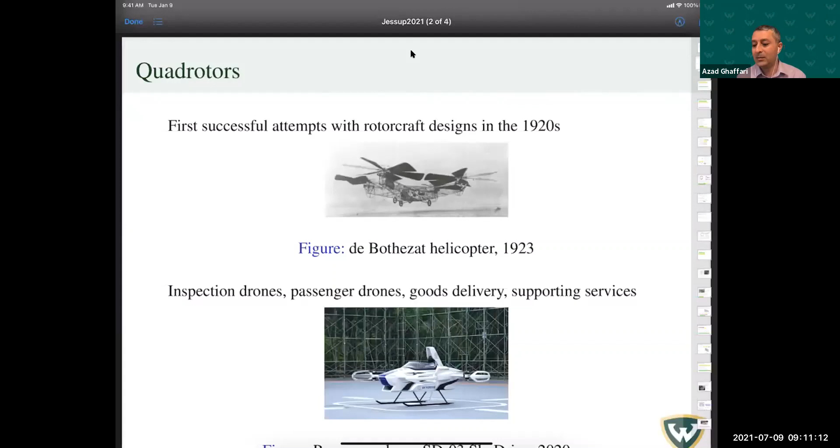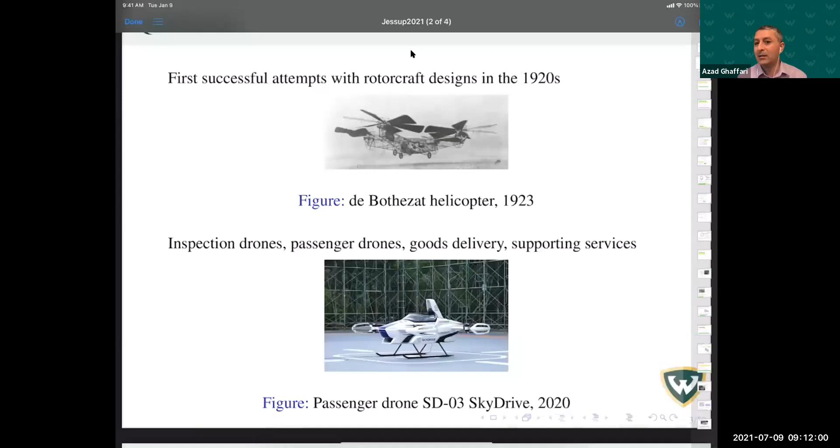We have seen the technology of drones and quadrotors explode to the extent that these days we have passenger drones. For example, we have multiple companies in Asia and in the US. The one that you see here was a prototype last year, and it can fly for almost 20 minutes. So that is still in its infancy. Passenger drones can contribute to solving mobility problems, especially in urban areas, because they can provide immediate relief to reduce traffic congestion in the future.

So what is the problem that we are trying to solve here? If you have a vehicle, either a UAV or a ground vehicle, it operates inside an environment, but the environment has multiple obstacles. The obstacles can be stationary or dynamic. In this demonstration, you can see that the UAV is shown in two different representations. The left one is the area vehicle representation, meaning that if you have an accurate model for the vehicle, you can incorporate those boundaries and limitations in the design process.

However, that complicates the problem dramatically. That's why in many cases researchers opt for the point vehicle representation, which is shown on the right-hand side. That means you are treating the vehicle as a point. But again, for tight maneuvers, for example if you want to park a vehicle, that has a different treatment. Obviously in that case, we cannot use the point vehicle representation.

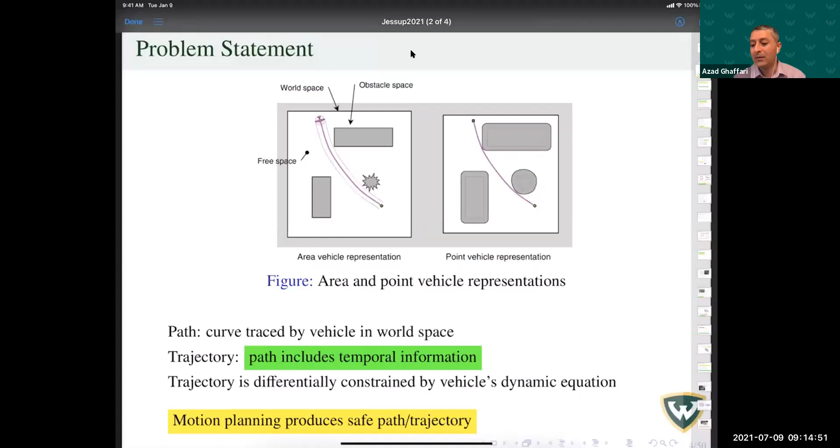Because we have dynamic properties associated with the vehicle, the trajectory is differentially constrained by the vehicle's equations. What we are doing here is trying to find a safe passage from the start point to the goal point, incorporating the dynamic behavior of the vehicle. If you look at the literature, the motion planning problem constitutes a variational calculus problem, and it has an analytical solution only for the simplest cases. So that's why you cannot expect an exact solution for the general situation.

And to this end, many approximation methodologies have been developed to come up with proper algorithms for motion planning. Many of these algorithms use the decomposition approach. By decomposition approach, we have 4 levels. First, the path planning problem is solved by approximation. And then, obviously, the approximation needs to be smoothened out.

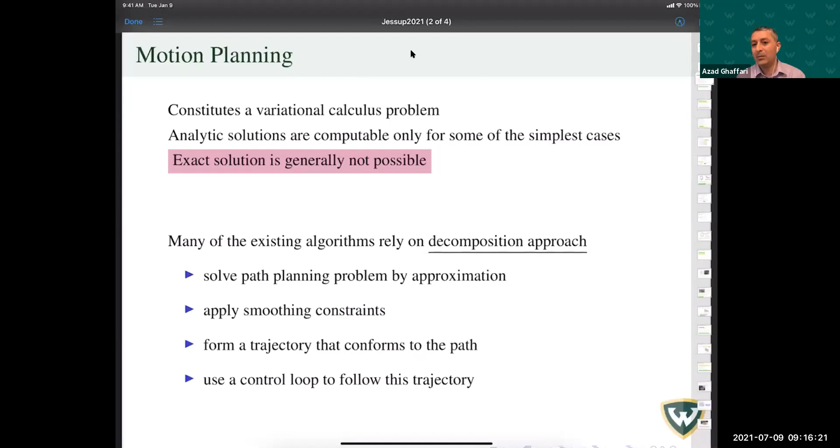And when we have the smoothened path, we then find the trajectory that conforms to the path. And then again, we note that the dynamic properties of the vehicle have to be incorporated into the trajectory. That means we have some dynamic constraints attached to the trajectory. And ultimately, when we have the trajectory figured out, there is a control loop that takes the vehicle through the environment on the safe trajectory.

But if you look at the problem, motion planning, trajectory planning, path planning, all of these phrases have been used interchangeably. These methodologies, because of the way that you solve the problems, are numerically intractable. It means if the number of obstacles increases, or the dynamic constraints in the environment increase, the solution takes longer to converge. So in many cases, you cannot perform agile maneuvers in the environment. And if we add additional complexity because of limited speed and acceleration, the problem becomes even more complicated.

So that's why many researchers have opted for feedback control, utilizing different feedback methodologies to navigate among an obstacle environment. The difference this methodology has in comparison with the existing motion planning methodologies is that you are not creating the safe trajectory. What we are creating is the safe control commands that allow the vehicle to safely maneuver inside the obstacle environment. So the popular methods that have been tried for using feedback control to achieve safety control.

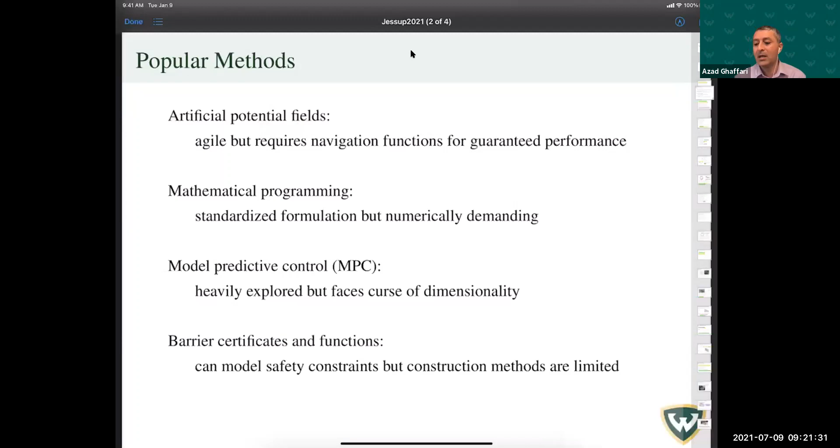The last methodology that has been recently explored is based on barrier certificates and functions. These functions are very successful at modeling safety constraints, and they can be used in conjunction with other methodologies. For example, you can use them with quadratic programming, or incorporate them with model predictive control. However, there is a catch with this methodology: the construction methods for the barrier functions are limited. As you see, for any methodology that we are exploring, there are some pros and some cons. But at the moment, because of the capability that the barrier certificates provide, and because they have been recently explored, we select the barrier certificates and work on these functions to create the safety constraints for our problems.

The design objective we have in this talk is to create analytically driven safety control algorithms. We want to minimize the numerical demand of the algorithm as much as possible. To that end, we allocate dedicated control modules with specified structures for various design criteria. The various design criteria come into play because we are dealing with a safety control situation. So you have, for example, a trajectory to follow, and then you also have to avoid obstacles.

There are also some constraints attached to the system that we are dealing with. So that means we have multiple design criteria. We have a multi-objective problem to deal with. So we use barrier functions to model safety constraints. And then we actually draw explicit relations for these barrier functions, which allow us to create assignable control structures, safety control structures.

And also the structure that we provide are parameterized. So that means the calibration and the design process becomes much easier because we have a limited number of control parameters that we can tune in an automatic manner, and that actually allows us to save time on design and calibration. So the control structure is modular, which reduces design complexity and improves scalability.

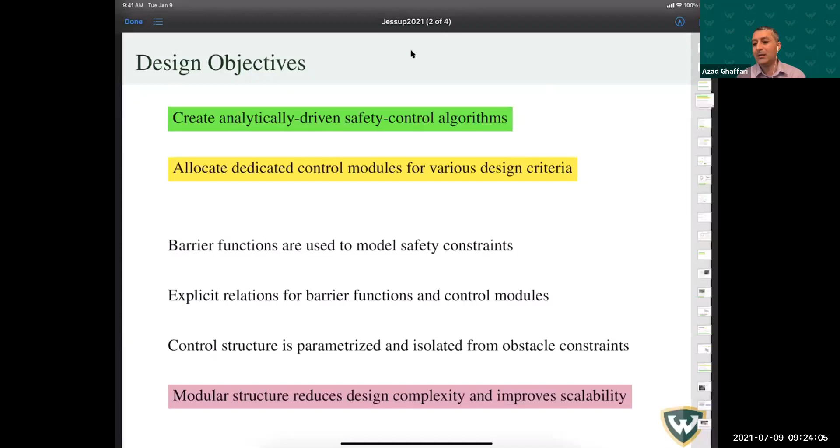Scalability is important because when you have an autonomous system in a cyber physical situation, the number of vehicles can be too many. So the number of obstacles, too many again. So it is important to have the control scalable because you don't want something which is super complicated. So if something changes with the vehicle or something changes in the environment, we need to have something which is easy to calibrate and tune. So that's why scalability is important and we highlight it here.

So the outline of this presentation, I divided in two sections. We first talk about the ground vehicles, which have actuator delay. The actuator delay in reality is translated into a limited thrust, a limited torque. So the objective here is we want to create agile safety control independent of the obstacle environment. The solution that we provide for this problem is to create explicit safety bounds using barrier certificates, and to compensate the delay on the actuator, we provide a two-layer Smith predictor, which we have shown in our experiments improves the transient performance of the algorithm considerably.

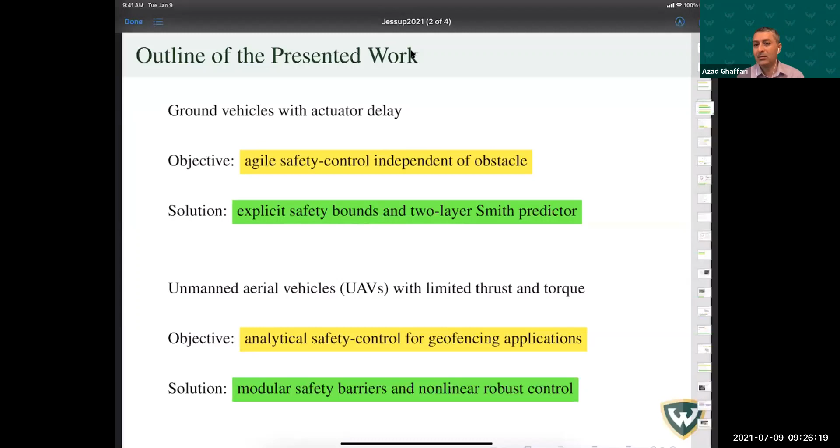The second part of the presentation, I talk about unmanned aerial vehicles. In this situation, we have limited thrust and torque. And our objective is actually to derive an analytical safety control for a geofencing application. So the geofencing application is another safety critical scenario. That means you have a safe net which you want to cast around the vehicle. So how to actually design the control that allows us to achieve the geofencing without challenging the control bounds of the vehicle. The solution that we have here is based on a modular safety barrier. And then we also use nonlinear robust control to achieve the desired trajectory tracking that we anticipate.

So let's go into the first part of the presentation. First is the ground vehicles. Our problem is to look at the safety control for ground vehicles. But there are some constraints attached with this ground vehicle. First and foremost, in many situations, we have time delay acting on the actuator. It means if you actually apply or actuate a specific control command, it takes some time to see the result at the output. On top of that, the ground vehicles that we have, they have under-actuated dynamics. So that actually complicates the control problem further.

On top of that, we also have multiple obstacles. So it's not that we are looking at a single obstacle. We have multiple obstacles, and the obstacles can take different shapes. For example, it could be an object or it could be a wall. So the methodology, we are using a nested modularity with integrated safety. And our solution is twofold. First, we have the two-layer Smith predictor, which allows us to compensate the time delay in the actuator. And the second contribution is the explicit safety control bounds that we found for the heading angles, which actually guarantees the safe performance of the vehicle in the obstacle environment.

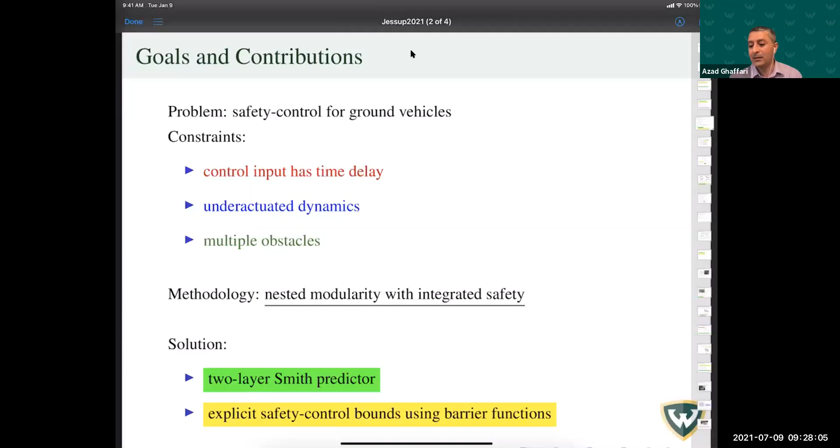The vehicle that we have in our lab, we base our study on this specific robot. It's a non-holonomic mobile robot. It has a differential drive, and it is equipped with multiple sensors: velocity measurement, acceleration, and, for example, bump sensors, cliff sensors. The kinematic model of this vehicle, if you look at it, is a third order equation, and it has been one of the benchmark problems in the control area in many papers. It has many interesting features. First of all, it has a non-holonomic constraint, which makes the control problem super interesting to analyze. And then on top of that, you have a servo system which actually drives the system. The servo system in this situation is comprised of two DC motors, and the DC motors, we can very accurately model as linear models.

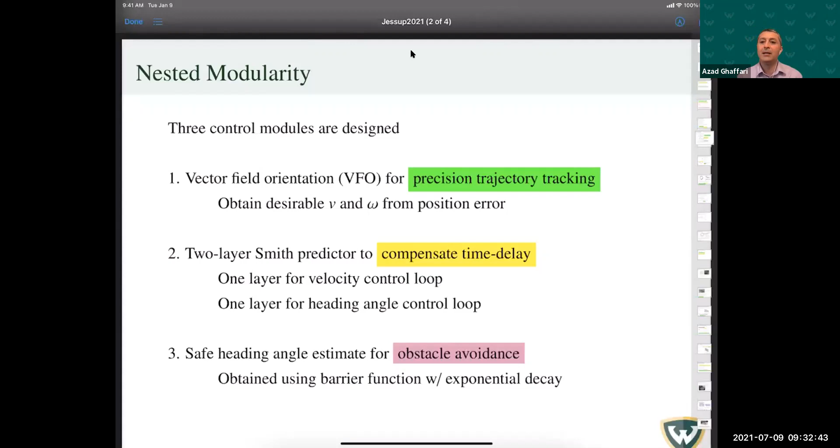And the last part of the algorithm, which is the safety module, comes into play. We use barrier certificates to obtain explicit bounds on safe heading angles. To this end, we enforce exponential decay on the barrier functions. And from this step, we get the safety filter, which we can incorporate in the design. And we show that the performance surpasses the existing competition.

So let's look at the first module that we are presenting here. The first module takes care of the trajectory tracking. If you look at this demonstration here, we have a red dot. The red dot represents the robot. The green dot represents the reference trajectory or reference path. The green arrow is the reference velocity vector. It has a magnitude of VR and the heading theta r. So the objective is to align the red vector with the green vector. But that's not the only concern that we have, because we also have position error, which is shown as the black arrow E in this demonstration.

Now what we can do is compromise. We can design the control such that we push the vehicle along the purple vector. If we do so, we are taking care of the first objective, which is aligning the red vector with the green vector, and the second objective, which is reducing the error. That is the purple vector. It is obtained through this calculation that you see on the left-hand side, which is shown as vector H, and that is the convergence vector field. The H vector, if you look at the magnitude, is VA. So that is the pushing control.

Azad, can I ask a quick question? Okay, the green arrow is tangential to the path. Yes. The path, if you look at the dashed black line, is the reference trajectory. So the green arrow is tangent to that reference trajectory. Thank you. Yeah, thank you. Okay, any other question?

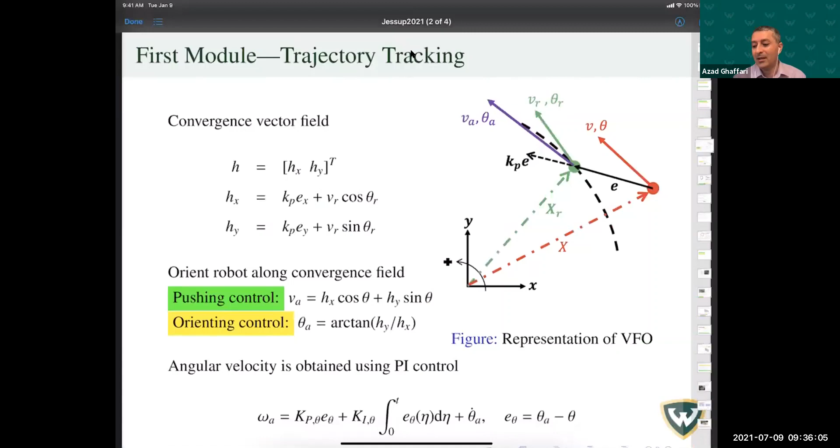Okay, so as I was saying, the differential drive servo system is comprised of 2 DC motors. You can pretty much use linear models to capture the dynamic behavior of these. If you look at the equations provided here for the left and right wheels, these are 2 linear equations. Lowercase d is the distance between the left and right wheels.

When we have calculated the desirable velocities, v_a and omega_a, from the VFO, we can actually calculate the desirable values for the left and right wheel velocities. Then we have an inner velocity loop to take care of this problem. That allows us to get the performance that we want from the VFO.

However, in this situation, we have time delay. When you have time delay, the VFO cannot get the performance that you are after, because we are changing the control signal, but the result shows up, for example, half a second or a second later. Half a second may not look like much, but it messes up the entire performance of the system. So that's why we propose a two-layer Smith predictor.

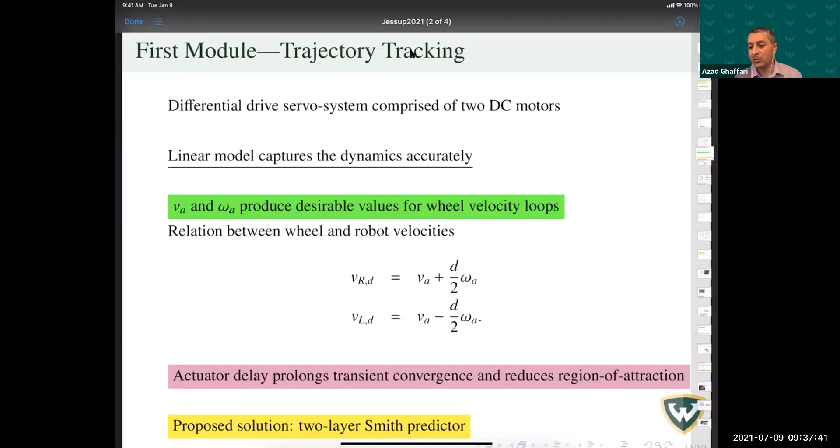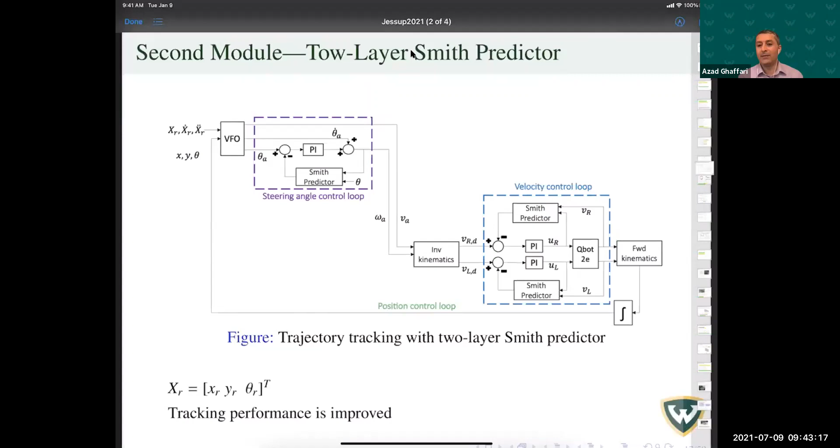And with this, we have shown that the tracking performance is improved dramatically. We have conducted multiple experiments, and one of the results that I show here is for a circle trajectory. As you see here, the dash-dot blue represents the VFO without the two-layer Smith predictor, and the red curve shows the performance with the two-layer Smith predictor. If you look at the right-hand side, figure A and figure B represent the position error and the heading angle error. As you see, the two-layer Smith predictor reduces the transient time by a factor of 4.

And it's observable that even the angle is performing much better. One important point here is that the angle plays a critical role in control of non-holonomic mobile robots, because technically the position X, Y is affected by the heading angle. So the slightest improvement in the heading angle improves the trajectory tracking dramatically. That's why we have the two-layer Smith predictor, because with a single layer, this performance cannot be achieved. And then the position error has basically gone down considerably.

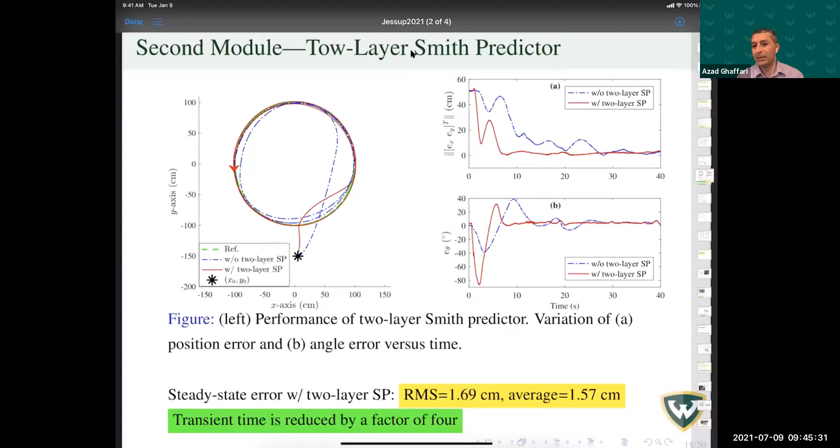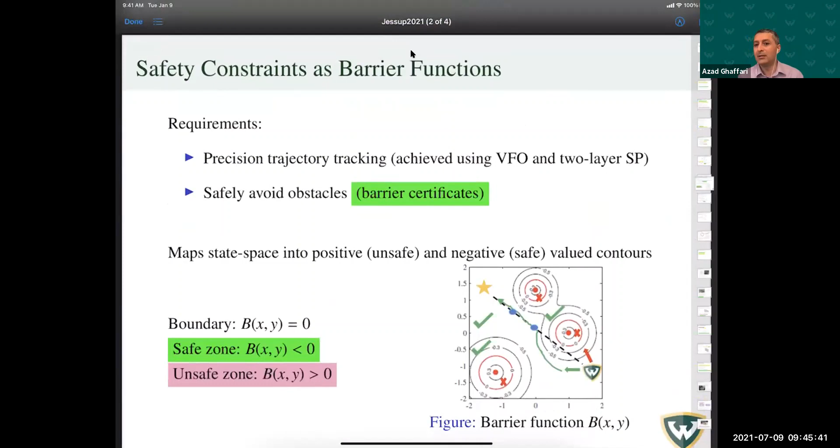The RMS value of the position error is 1.69 centimeter, and the average is 1.57 centimeter. Considering the accuracy of the measurement and the accuracy of the control commands that we have here, this is a great improvement in the trajectory tracking for this application. So we have taken care of the trajectory tracking, but we still have to deal with the safety issues. If we have an obstacle in the environment, how do we deal with it? Our intention is to design control modules that take care of these different objectives. The first two modules, the VFO and the two-layer Smith predictor, take care of the trajectory tracking, so we get precision tracking using these two modules.

Now let's look at the safety issues. Barrier certificates have the capability to map the environment into positive or unsafe zones and negative or safe valued contours. If you look at the figures on the right-hand side of this slide, the areas marked with checked green are the safe areas, so you can navigate in these areas. The red contours around the obstacles mark the boundary of each obstacle. The boundary stands for a zero contour, and the safe levels are defined as B negative. When B is negative, the vehicle is safe; otherwise, if B becomes positive, we are at risk of a collision.

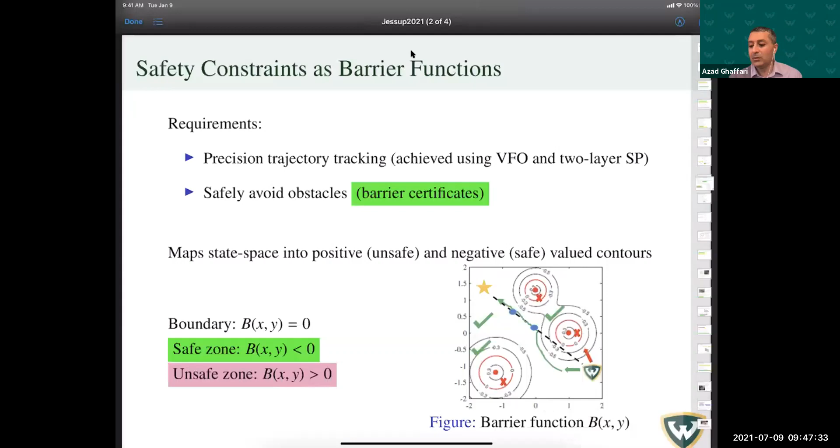Let's look at the mathematical foundation so that we can actually use it. Here we provide a basic introduction to barrier certificate functions. There are many different types; I can count at least 4 types of barrier functions: barrier certificates, Lyapunov certificates, Lyapunov barriers. Here we look at barrier certificate functions, just to conduct our analysis.

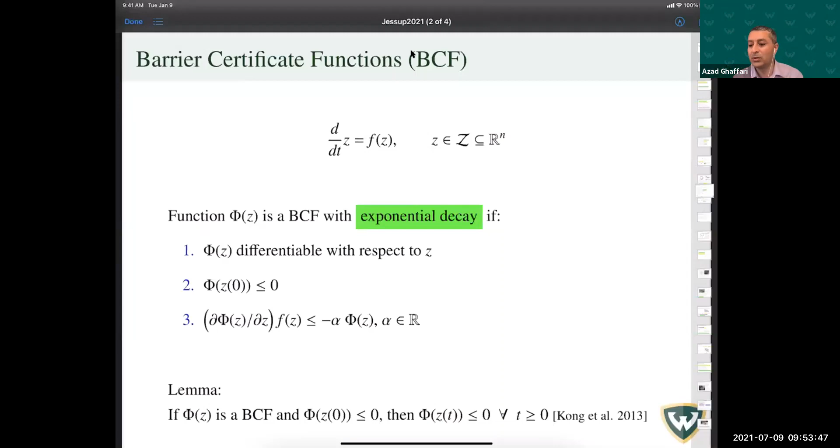The other methodology that has been recently explored is to use, for example, logarithmic functions or exponential functions like normal distributions. The map that you see here can be a candidate, implemented using a normal distribution like function. We have limitations in selection of the functions, but we can make assumptions to make our life easier. If you consider your obstacles as certain shapes, like a circle or a rectangle, there are already methodologies that allow you to get these functions. But if you have a more complicated shape, like a bigger obstacle or concave situations, that is still under development.

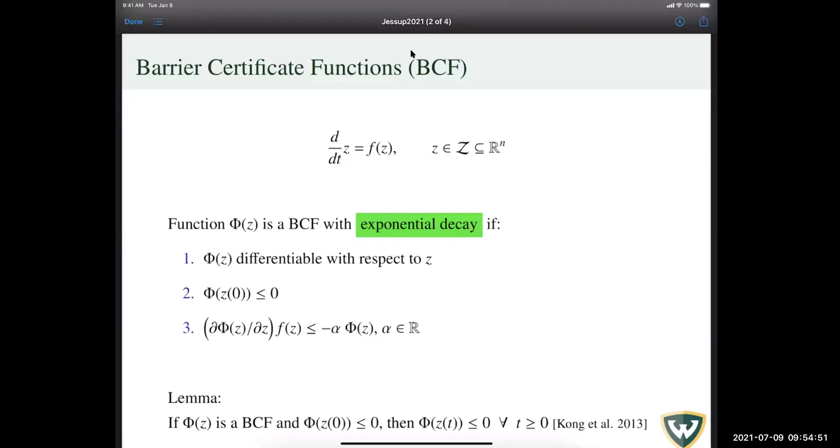Thank you. Okay, you're welcome. Thank you. So any other questions?

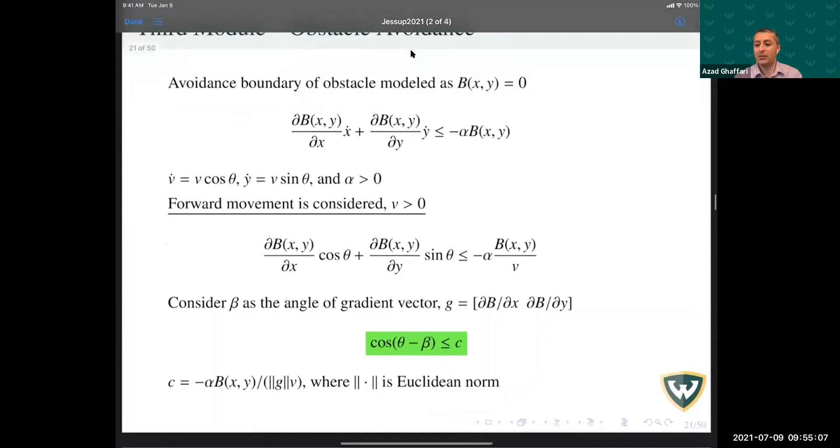Okay, so let's look at the capability that we get if we have a barrier certificate function. As we have here, if there is a barrier certificate, the boundary of the obstacle is shown as b equal to 0. The third condition gives us the exponential decay, which is shown as the first equation here. Let's say that we have this barrier function figured out for this certain situation. We have a bunch of obstacles, and we have figured out B here.

So now we have the equations to actually calculate the safe envelope for the heading angle. One assumption that we make here is the vehicle can only go forward. So this is just a forward moving situation. We cannot just come back, which is basically the assumption that we have to make when we are dealing with autonomous vehicles. If this is the situation, now using the third assumption on the barrier certificate function, if you do some simplification, you end up with the condition that is shown in the green box. This condition allows us to calculate the bounds on the safe heading angles.

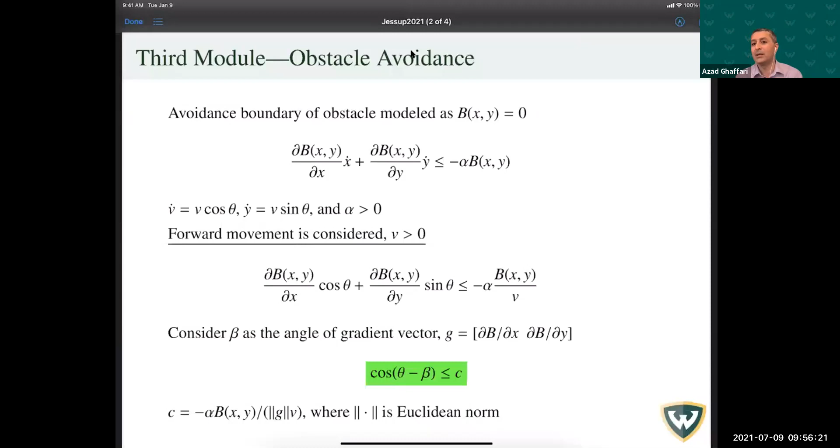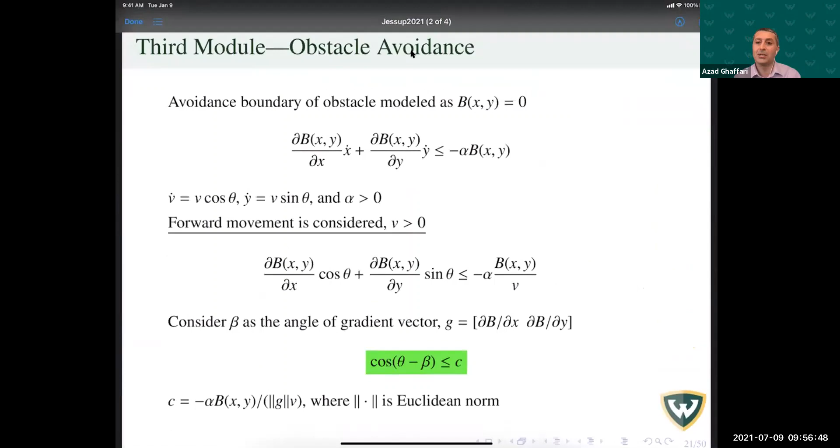Further calculation tells us, if you look at this inequality, we have a cosine function less than c, and c is an expression of the barrier function and g, which is the gradient of the barrier function. So it is a rather complicated expression. It's not just a constant value. It changes based on the position and the velocity of the vehicle. If we are far enough from the obstacle, this value of c is larger than 1. It means this condition is always satisfied, so the heading angle is safe. There is no need to adjust the heading angle.

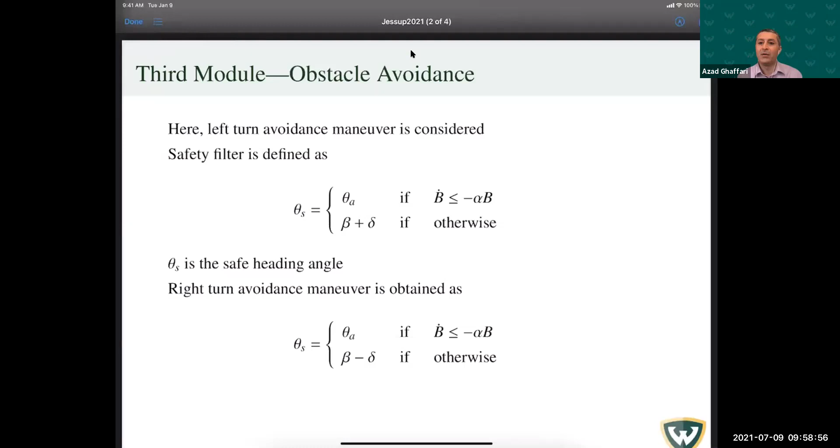If we go left, the upper condition that you see here is the calculation that we have to do to get the safe heading angle. If the barrier certificate satisfies the third condition, we don't make any adjustment to the heading angle that is calculated from the VFO. However, if the third condition from the barrier certificate is not satisfied, then we make an adjustment. Either we go left or right. If we go left, it's beta plus delta for the heading angle. If we go right, it's beta minus delta for the heading angle.

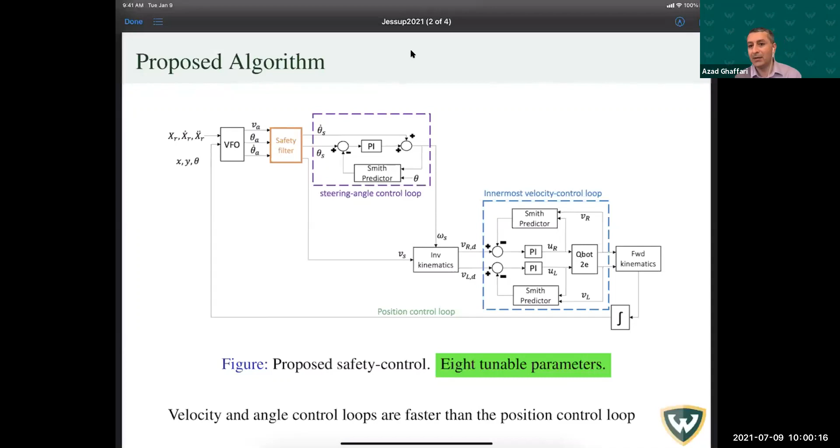One side note is that, to get the performance that we want, the innermost loop has to be fastest. That's why the velocity and angle control loops are faster than the position control loop, which is implemented using the VFO. If this is followed, now we can look at the experiments, see what is going on, and see if this works properly.

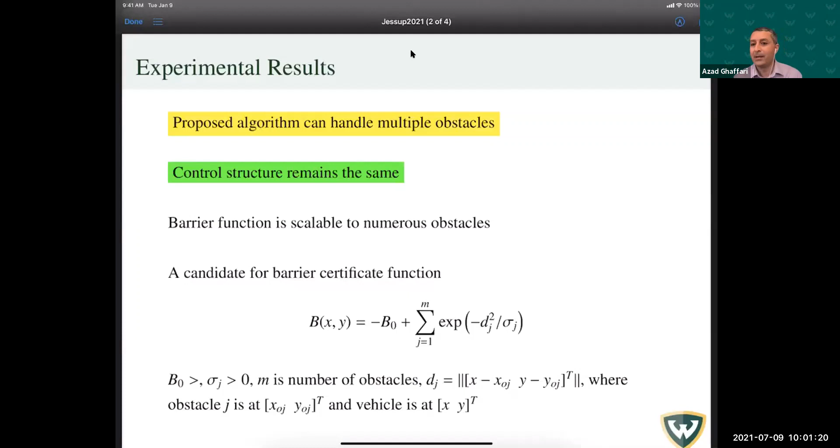This algorithm can handle multiple obstacles. The control structure is the same, so we don't have to modify the control structure. The only thing that changes if the number of obstacles changes is the barrier function. So the barrier function is scalable to numerous obstacles. One candidate that is used here is shown as this exponential function. This exponential function relates the distances between the obstacles and the robots and converts them to this barrier function. And we have some constant parameters, including B0 and sigma j, which allow us to further tune this barrier function.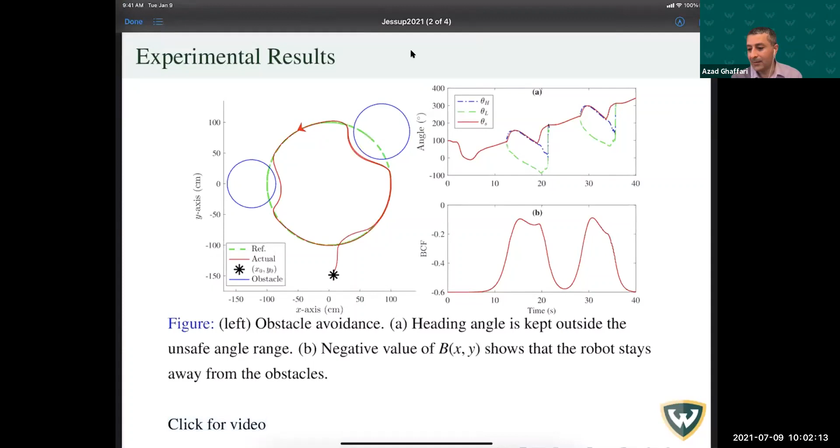Okay, so this is a demonstration of this case. You see the two obstacles that are in the environment, and the vehicle goes through the environment and avoids the obstacles. Because we didn't have a camera on top, the reference is a circle, but it is distorted this way to show this reference trajectory. So this is what is happening with this case. This is the first case, one of the experiments with the circular reference that we tried.

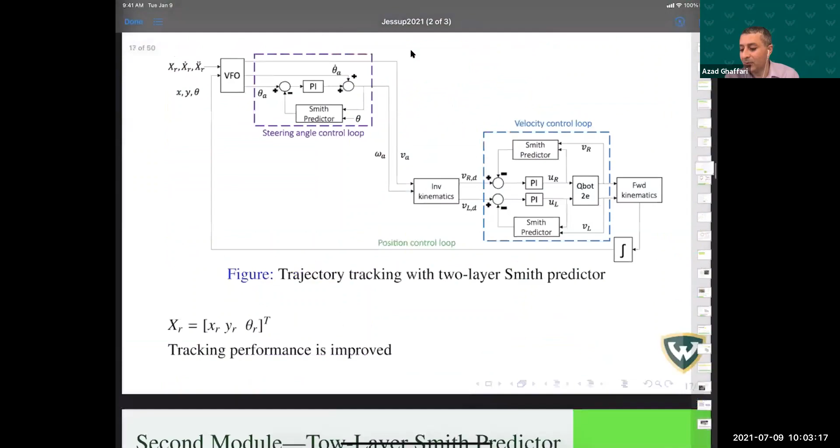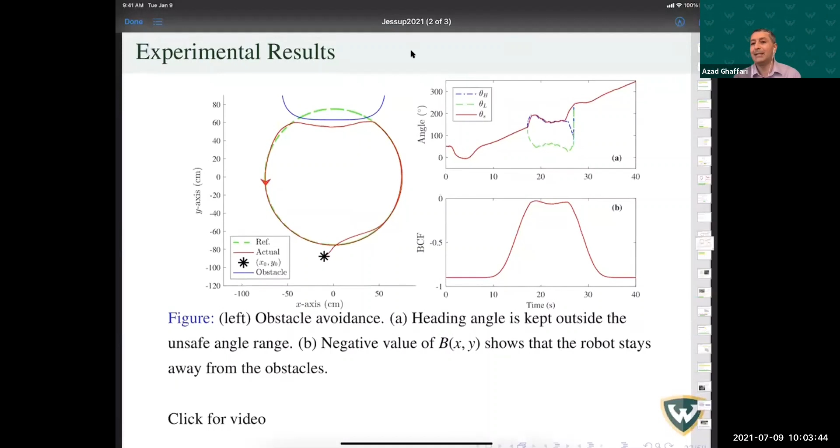So now we have another experiment done. This experiment is for the situation where we have a wall. If you have a large obstacle, it doesn't necessarily have to be a circular obstacle. It's a big obstacle which can represent a wall. So the same situation happens. You can see that the algorithm tracks the reference and then safely avoids the obstacle, and the heading angle is kept outside the unsafe cone, and the barrier certificate also stays negative all the time. So this is the wall experiment that you can see here.

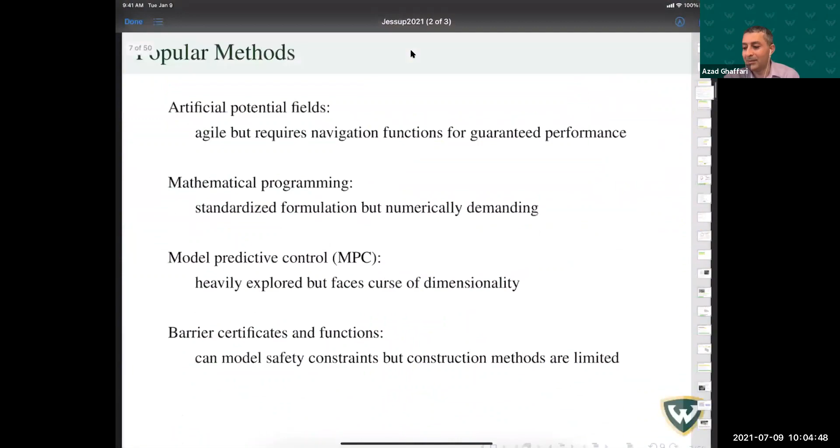Please pay attention that when the vehicle gets close to the obstacle, it adjusts the heading angle. You see, when it goes too far, it adjusts the heading angle to come back to the reference trajectory. And then after it passes the obstacle, it successfully goes on to track the reference trajectory. These two experiments were among the numerous cases that we tried in our lab. This experiment concludes our discussion about the ground vehicles. If there is any question about this case, I would be happy to answer. Otherwise, I can switch gears and talk about the aerial application of the safety control.

Hello, Professor. Hello. Can I ask a question? Yes, go ahead. How does the robot know the information of the obstacles? Is it using a map or is it sensing the obstacles? Okay, because we have a stationary environment, the map is already fed to the system. So that's how we get this done. At the moment, there is no algorithm, for example, simultaneous localization and mapping, involved in this process. We consider a map for the environment, which means that we already have the location of the obstacles available to us. All right, thank you, Professor.

You're welcome. So Azad, in the same thinking, because your optimization problem can be applied to multiple vehicles, in a multi-vehicle situation there must be some kind of V2V communication that will do the optimization at the same time. Yes, that's a good question, and that's the problem that we are currently working on. In that situation we have vehicle-to-vehicle communication, and that becomes very interesting because you now have the barrier functions changing in time. That means you have a time varying situation. That is pretty interesting when you have, for example, leader follower, or you want to overtake a vehicle. That is a situation where you need to have the information. It has been quite an interesting problem for us during this summer. In the lab, we have worked on these two problems. So that was a good question.

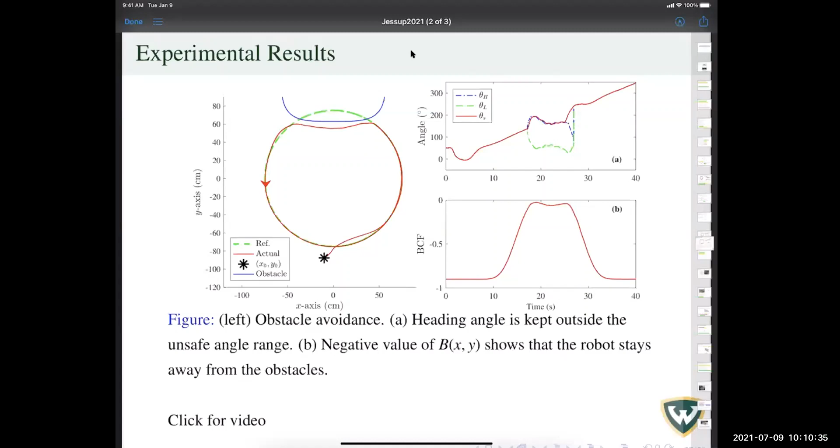Thank you very much. Thank you. Okay, so any other questions? Okay, so thank you very much.

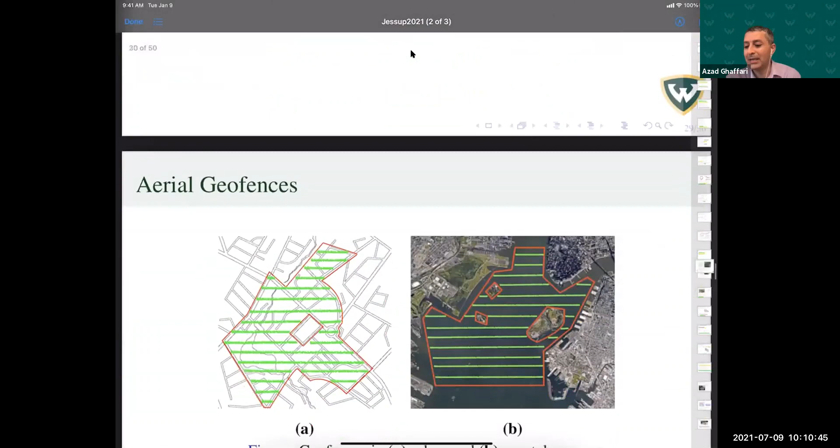Very interesting questions. So let's look at the unmanned aerial vehicles. As I said, especially passenger drones have become quite interesting these days. I think in 2016, a company in China, Ehang, created a vehicle that you can actually purchase. It's a flying passenger drone. The price is quite high, $250,000 US dollars, and you can fly maybe for half an hour, but that's just the start of this technology, maybe in 15 years or so.

In 15 years, it has been estimated that by 2035, the share of passenger drones will be almost 35 or maybe 40 billion US dollars. That's quite a big market, which will open new areas to this technology. If you have a passenger vehicle, one situation is that you want to contain this vehicle inside a safe net. So you cast a safe net around the vehicle.

For example, if you are operating in an urban setting, as shown in this left-hand figure, the dashed green area is your safe area to explore. You cannot get out of this area or get into the middle of this urban area. Or if you have a coastal situation, maybe you have some structures on these islands on the right, where you don't want civilian drones to get to those areas. That's why the geofencing problem comes into play, and barrier certificates are quite capable of modeling such conditions. As we talked about, barrier functions can be used for obstacle avoidance. Now we explore the possibility of using them to get this geofencing control design done.

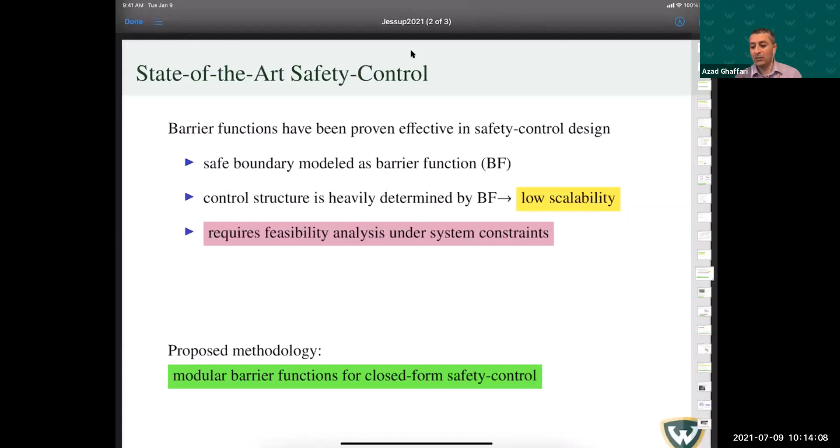That way we can actually facilitate our feasibility analysis, because in this situation we have limited thrust, we have limited actuation, and that brings up some new problems about feasibility analysis. So what we are proposing here is a modular barrier function, which gives us a closed form for safety control. So with this problem, again, we have some limitations.

The input, the control commands are saturated. So there is a limitation on the control command. The system, again, is underactuated. We have a 12th order system. However, we have 4 actuations, so that's it. So we have to deal with this property of the system.

And then on top of that, we have low rate position measurement. In reality, even if you have a GPS system, you cannot rely on that kind of information. So that's why we need to consider this limitation when we are designing the barrier function.

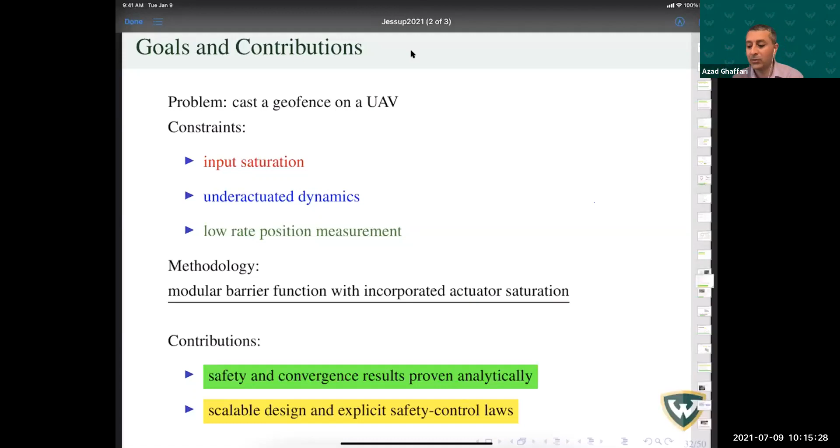So what we get out of this proposed solution is an analytically proven safety and convergence for the algorithm that we have, meaning that we can prove analytically that we follow a given reference trajectory and we safely stay inside the geofence. And our design is, again, scalable because it has an assigned structure. And then the control laws are explicit.

So this is the UAV that we have in the lab. It is designed to withstand tough experimental situations which we come across in the lab because we have limited space. So this guy has interesting behaviors. As I said, it is a 12th order system. But with some interesting methodologies, you can convert this complicated system to 6 decoupled double integrators.

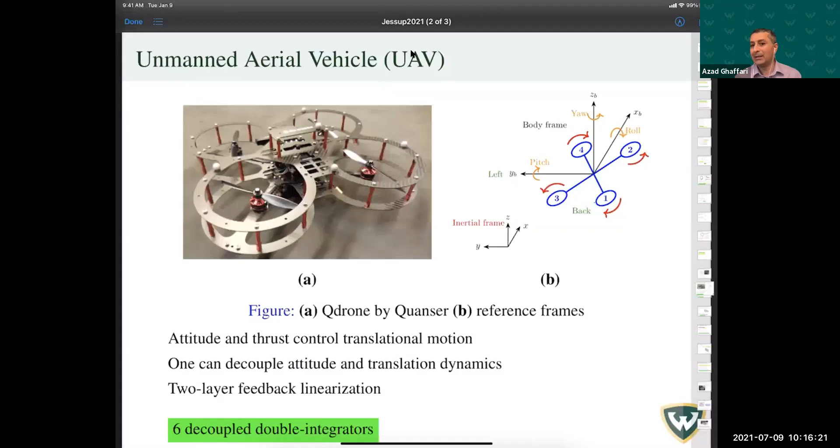That means we can now look at one double integrator to analyze its behavior, and then expand this in a modular fashion to get the safety control that we want. This process is done through a two-layer feedback linearization, which is a quite popular methodology. So let's look at this double integrator problem that we have here.

So we start with the simplest situation. Let's say that we have the barrier position at the origin. We want to maintain the position always below the origin, meaning that we want to make the position always negative. Keep in mind that in this situation, the acceleration is limited. Because we have limited resources, we cannot accelerate or decelerate infinitely. So the problem is to design the safe limits of the acceleration such that the position stays negative for all feasible initial conditions.

Again, this is important because x less than 0 includes many initial conditions, like half of the space. But half of the space is not feasible; some of them are not feasible initial conditions. So that's another thing that we need to take into consideration. What we do is incorporate the control saturation into the shape of the safety barrier that we obtain. If you look at this double integrator, because it has limited acceleration and deceleration, if you sit inside this gray area, you can go to the origin and stay inside the shaded area with the limited acceleration and deceleration you have.

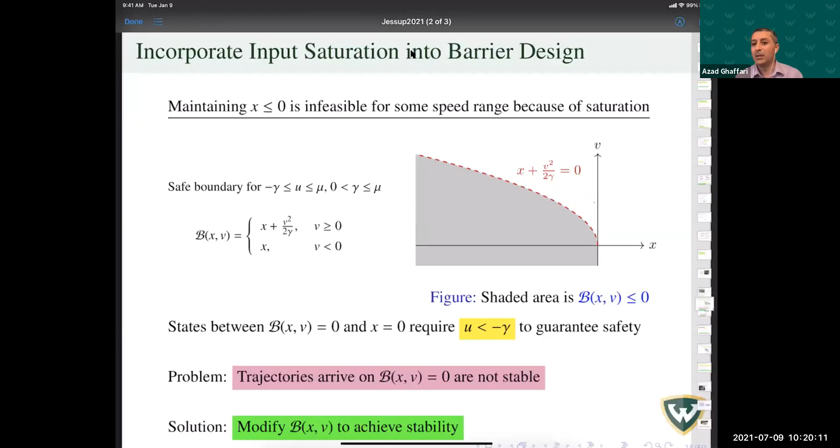So, or even if you don't have uncertainty, you won't stop at the origin. Stopping at the origin is important because we also have to prove the convergence of the algorithm. If we are to track a reference trajectory, we have to know at each moment where we are staying. That's why we need to modify this barrier function such that if we arrive at the barrier function, we can show that the system stays at the origin.

For this purpose, we look into some modification methodologies. If you look at the functions drawn in this plot at the bottom of this page, you have a dashed blue, dashed black, and then green, and the red one is the curve that we have found, which does not let the vehicle stop at the origin. However, the other curves actually stand for beta x. So beta x is the function that represents these three other curves.

In this situation, we have a constant parameter rho, which changes the shape of this function. As you see, if you decrease rho, make it small, you can get as close as possible to the actual barrier that we found initially. But the difference is here: if you look at the equation, especially around the origin, if you do some linearization, you can see that the approximation is v plus square root of gamma over rho times x equal to 0. Because the square root of gamma over rho is a positive value, you know that this equation gives you a stable motion. It means the position will stop at the origin.

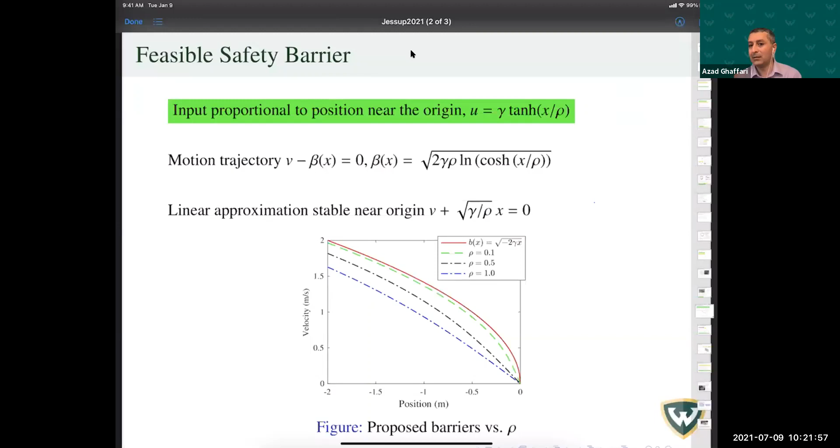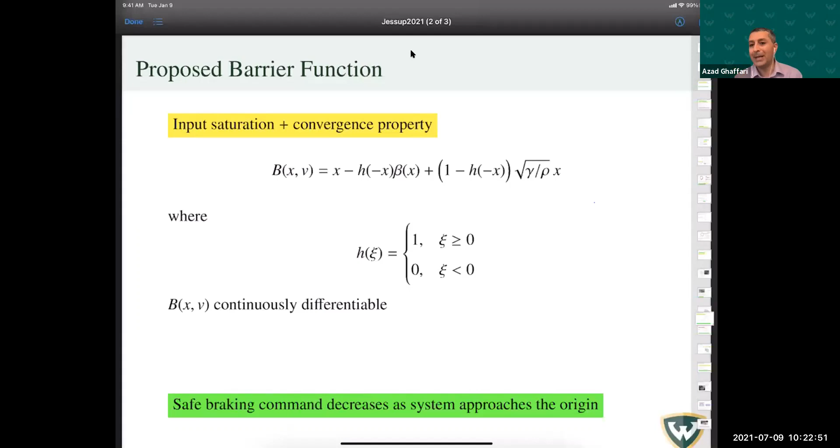So this function is giving us two things. One is the feasible initial conditions, and the second is a stable motion, meaning that we will stop at the origin. To do this right, we present this in a proper mathematical form. Please note that h is a step function. However, if you look into the mathematical properties of this proposed function, it is a continuously differentiable function. With this barrier function, if we obtain the control command, we can see that the safe braking command decreases as the system approaches the origin. That means we can keep the vehicle to stop at the origin. That's a key property that we need to get the performance that we want from our trajectory tracking.

So this is the first result that we present regarding this safety feature. First, we know that the input is saturated between minus mu and mu, where mu is a positive value. Then we know that B, which we found in the previous slide, is a barrier function for the double integrator that we have discussed. The safe set of this barrier function is shown as capital omega. We go through the mathematical analysis and get the safe bounds on the control command. If we maintain the control command always less than US, shown as this expression in the middle of the page, we can show that the safe set omega is forward invariant for all time larger than 0. Forward invariant means if you start inside that set, you stay inside the set forever. So that means the safety is satisfied.

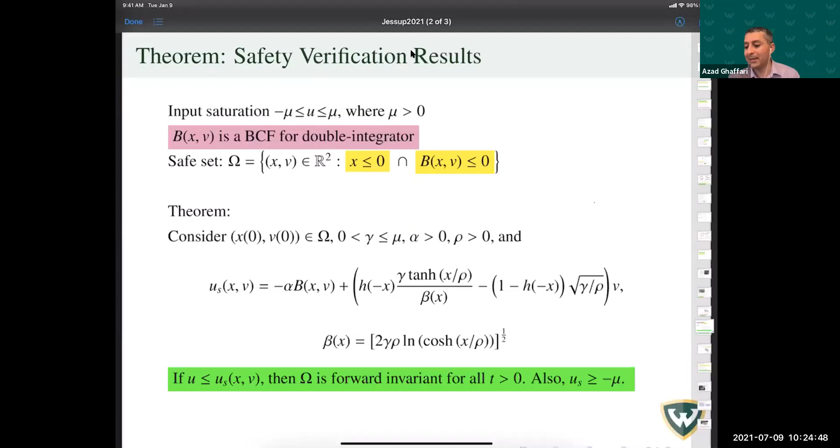On top of that, another cool property that comes with this barrier function is that the function US is always larger than minus mu. That is why this allows us to use the expression that we have found as a standalone block in our control design, because we know that the control value always satisfies the limits of the actual system. So if you have this limit on the control, obviously it gives you safety.

How about the convergence? That was among our initial considerations, because safety is not the only objective. The second objective is that we need to converge to the origin, to maintain the tracking at an accurate level. For that, we modify the control signal using the saturation function provided here. The saturation function represents the actual actuator that we have, which is between minus mu and mu. The part that goes inside the saturation block is a minimum function, which is the minimum of UR, a function that comes from a trajectory tracking algorithm. It doesn't matter what kind of trajectory tracking you are using.

And then you have US, which is actually found from the previous theorem, which is the upper bound of the safety control that we have found. So if we have this control block implemented inside our system, we have both safety and we also converge to the desired position, as long as the desired position stays inside the feasible area.

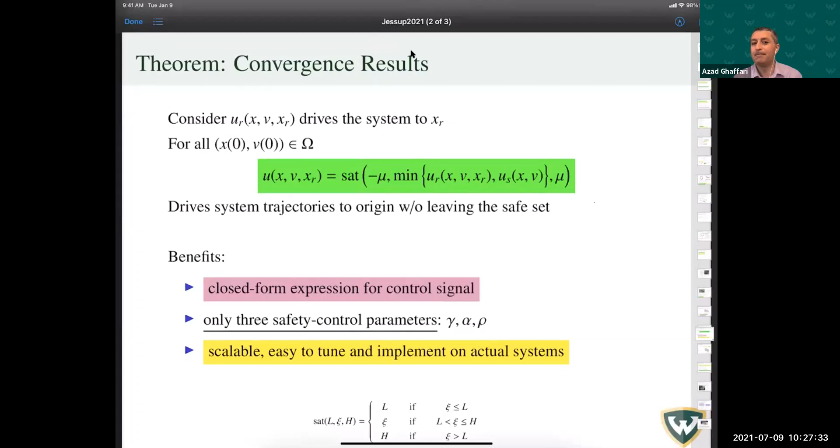So before I move on, any question about this first part of this geofencing problem? Okay, no question.

So let's see. In reality, you may want to limit the vehicle between a low and a high value, it's not just an open-ended situation. You just have to maintain the position between a low and a high value. Now, because this barrier function has a modular structure, and we have found this for x less than 0, we can shift this function to left and right to get the barrier functions to maintain the vehicle inside an upper and lower position. As you see with this modification, the shaded area is the safe set when we have a lower and an upper limit for position. The safe set becomes obviously a little more complicated to express, but nevertheless, it has a defined shape.

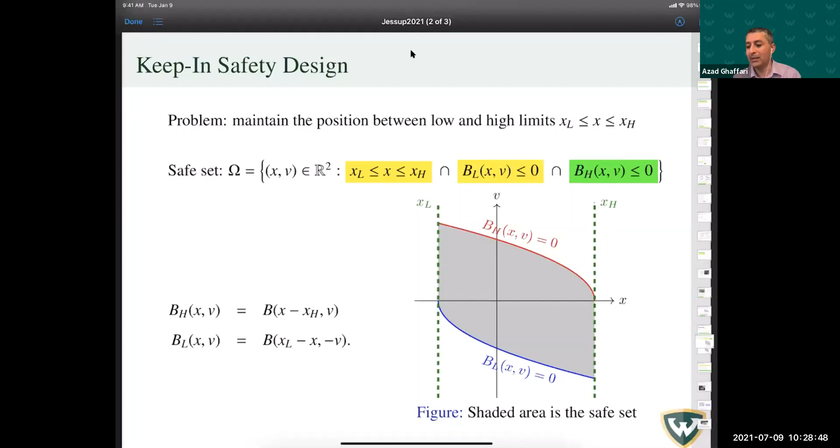From this, we can find the keep-in safety design when we want to maintain the position between a low and a high limit. This is the expression that we get for our control signal. It has a nested saturation function, one saturation nested inside another saturation. The outer saturation function represents the actuator which comes with the system. We represent it here mathematically to reflect the fact that the system has limited actuation.

The inner saturation function is maintaining the vehicle safely between the low and high position values. And then the innermost part of this saturation, which is UR, is the reference tracking, or the trajectory tracking. As we said, this trajectory tracking algorithm can come from any design that you have. It could be nonlinear, sliding mode, PI, or PID. It doesn't matter. As long as you have the control commands for the trajectory tracking at your disposal, just plug it here, and the rest is ensured that you get the safety that you want.

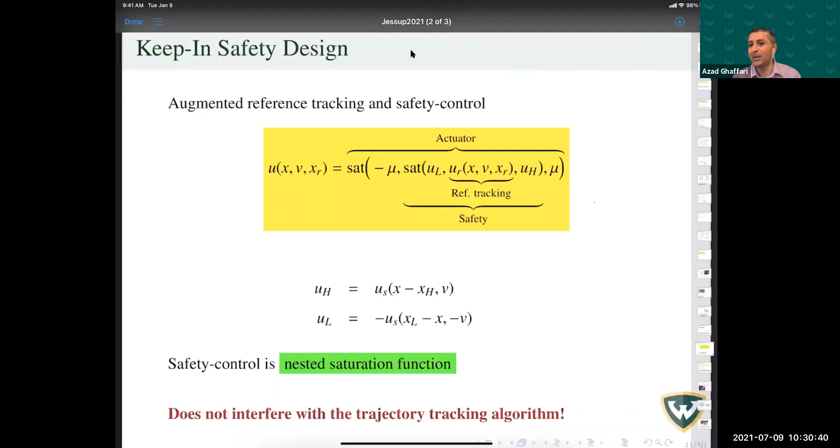And that's a big plus, because you don't want to redesign the trajectory control algorithm that you have. If you have, let's say, a bunch of vehicles, why would you want to redesign the trajectory tracking if it performs right? You just plug the safety block inside the algorithm. The tracking algorithm that we have used here is based on the super twisting algorithm, and that's not the focus of this work. If somebody is interested, we can talk after the meeting. We have used the super twisting algorithm to get the performance right for the trajectory tracking. We also used different variations of PID design, but the super twisting is by far the best performance that we have got so far.

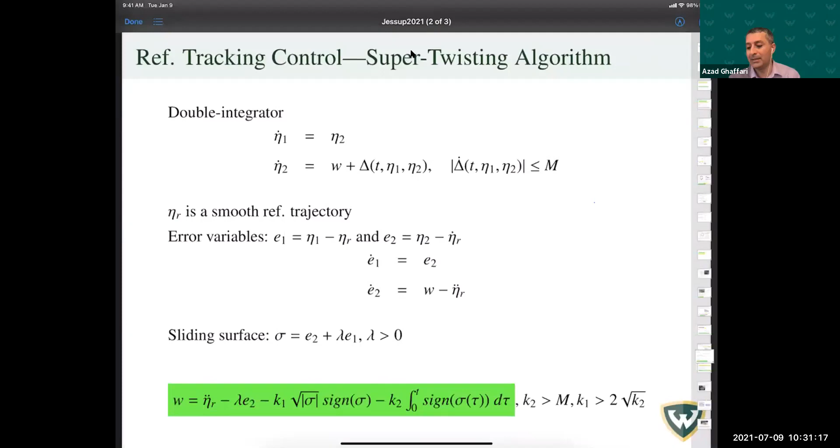So this is the summary of our control design for the UAV. We have a system which is under-actuated. It has 6 degrees of freedom, so it's a 12th order system with 6 degrees of freedom and 4 actuators. We use feedback linearization to convert this into 6 decoupled double integrators. We use the attitude and thrust.

So meaning we use the rotation and thrust to control the trajectory. And then we use the roll, pitch, and yaw torques to actually control the attitude, meaning the orientation of the vehicle. Because the UAV's trajectory is controlled through attitude, the attitude loop has to be faster than the trajectory tracking loop. So the modular design allows us basically a similar safety control structure for all the translational axes.

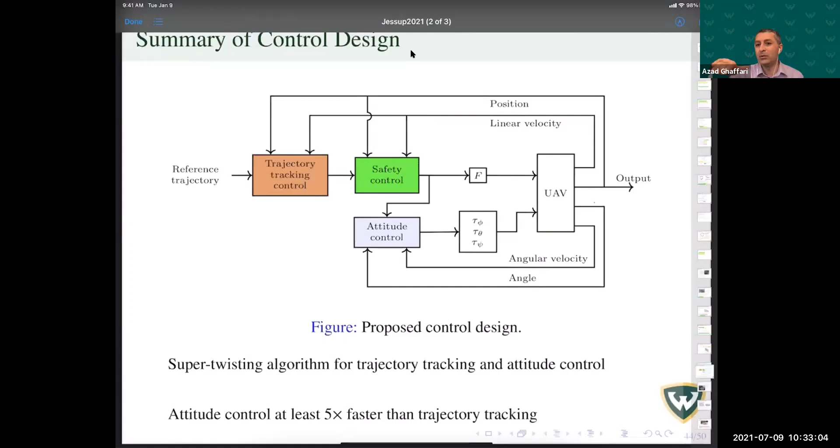So this is the block diagram that we have. And as you see, the safety control actually sits in between here, so it does not mess up any part of the design that we have here. And as I mentioned, the attitude control is actually faster than the trajectory tracking control by a factor of at least 5. Because you are actually producing torque by rotating properly, you need to rotate fast enough to create the torque that you like. So that's why the inner loop has to be faster.

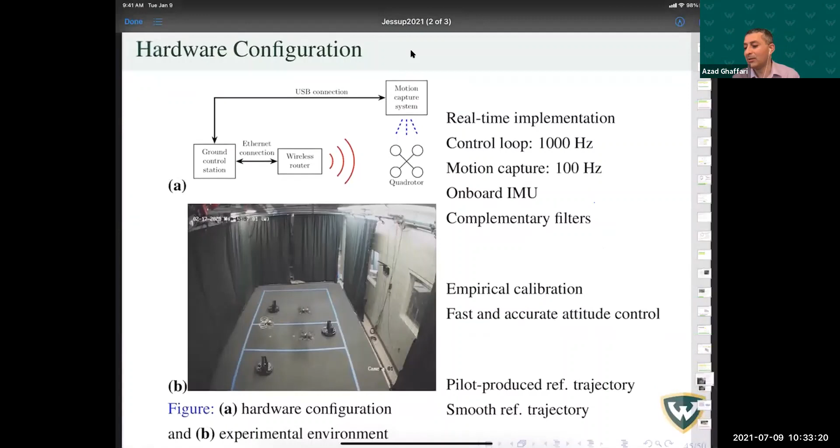So this is the hardware configuration that we have. As you see, the lab that we have is not that big. So hopefully we can convince the department to give us a bigger space down the road when we expand our experiments. We have a control loop which runs at 1,000 Hertz, and the motion capture system runs at 100 Hertz. So that means the position information is updated 10 times less than the control loop. We have onboard IMUs, and complementary filters are used to improve the position estimation that we have here.

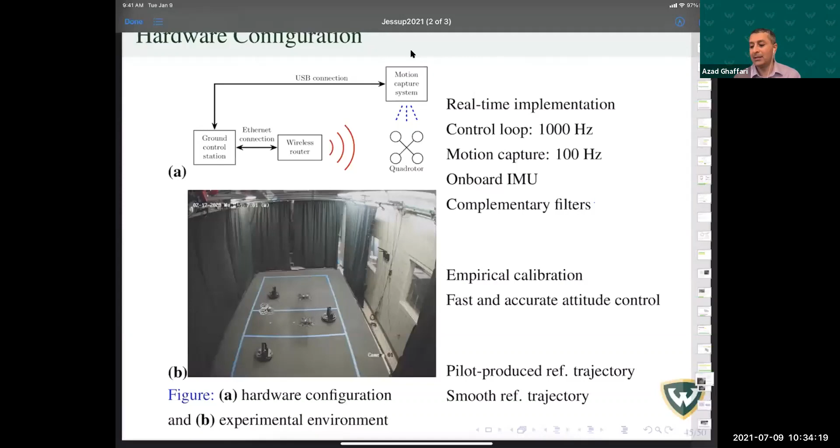And then we have 2 cases presented here. One case is a pilot-produced reference trajectory. This one is conducted to test the robustness of the algorithm. If we change the reference, what is happening with the algorithm? Does this algorithm survive the changes that are produced by the user? And the other application is when you have a priori reference trajectory. So let's see what is happening. So this is the first case.

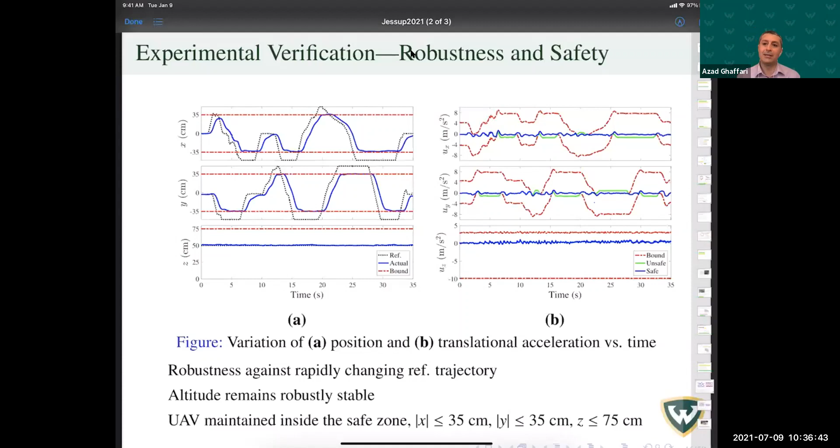And on top of that, if you look at the behavior of Z, because we are doing these maneuvers along the XY axes, the vertical axis stays rather stable. So that means our algorithm is both robust to changes in the X and Y axes, and it is also safe, meaning that we can guarantee that the vehicle stays inside the safe zone, regardless of the changes that are forced by the user.

So the second experiment is the case where the reference is already known. We have a priori reference. If you look at the black dot, that's the hover position. So we bring the vehicle to this hover position, and then we go on a spiral. The dashed black line creates a spiral, but that spiral actually goes outside the geofence that we have put around this vehicle. But because of the safety control, the vehicle is maintained inside this geofence. And if you look at the right-hand figure, X and Y, the safe limit on X and Y is 35 centimeters.

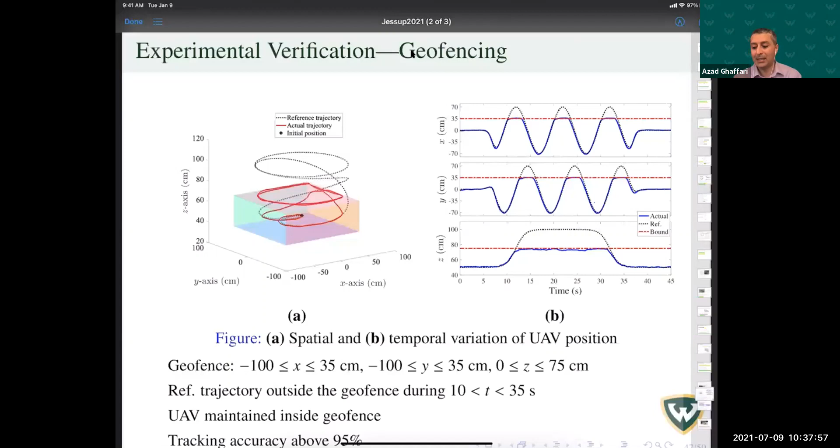And then you see that the algorithm successfully maintains the X and Y at the predefined limit. And the Z also is maintained at 75 centimeter, despite the fact that the reference actually goes to 100 centimeter. And then the accuracy actually is quite good here. So we have a 95% accuracy for the reference.

And also, one other thing that is worth mentioning, similar to the ground vehicle, the attitude actually plays a key role in the performance of the system. And as I said, the attitude control is almost 5 times faster than the, okay.

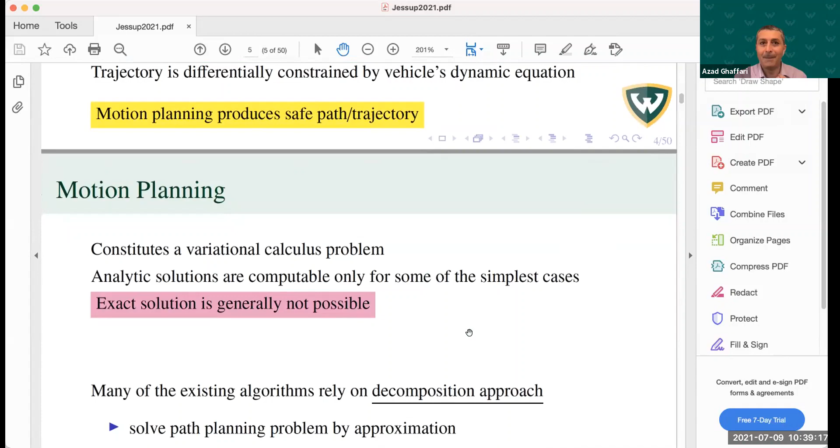Okay, sorry, I think, can you hear me? Hello? Yes. Okay, sorry, I think I lost my iPad, so I continue from my laptop actually. So let me go to the slide.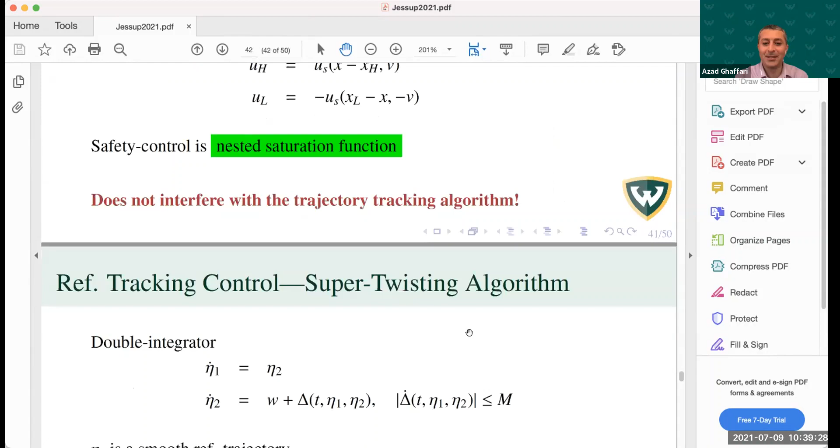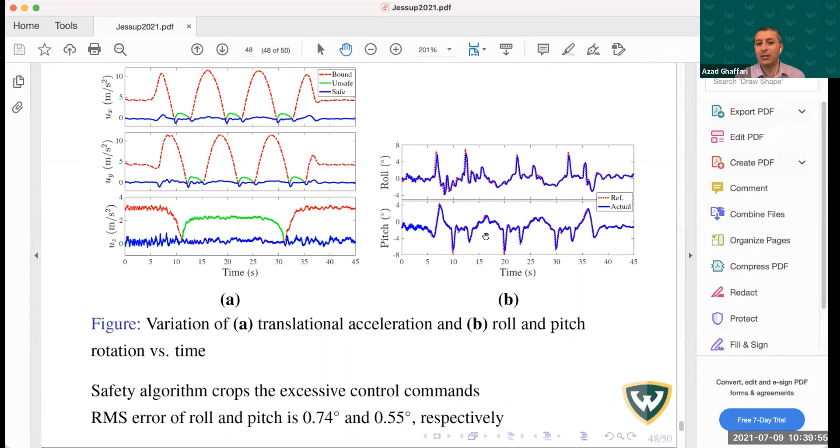So, as I was saying, this is the performance that we get from the attitude control. And as you see, the attitude actually tracks the reference attitude quite accurately. And the RMS error for the roll and pitch is less than 1 degree. So that's quite good.

And with this, I want to say a little bit about our university. Wayne State was established in 1868. We have been in the Detroit area for more than 150 years. And we are proudly serving more than 26,000 students, mostly from Detroit. We have a diverse population, minorities, so many different groups.

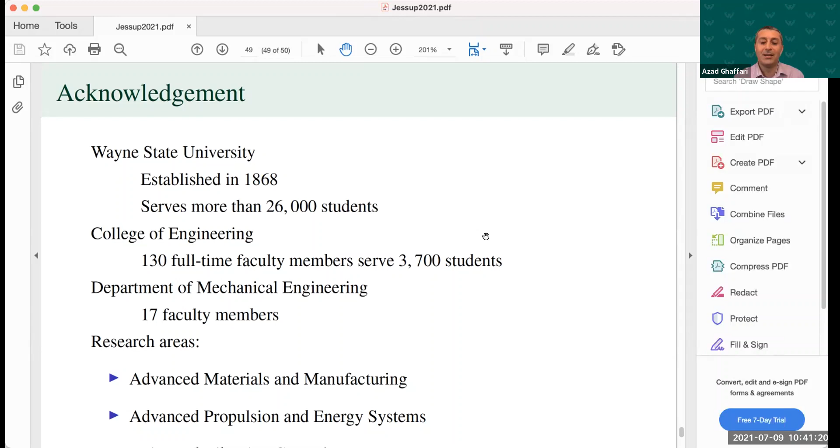And in the College of Engineering, we have 130 full-time faculty members. We serve 3,700 students from different backgrounds. In the Department of Mechanical Engineering, which is the department that I'm associated with, we have 17 faculty members, and we anticipate having some new faculty in the coming years. Our research areas are in three main thrust areas: advanced materials and manufacturing, advanced propulsion and energy systems, and noise and vibration control. Obviously, my area fits with noise and vibration control.

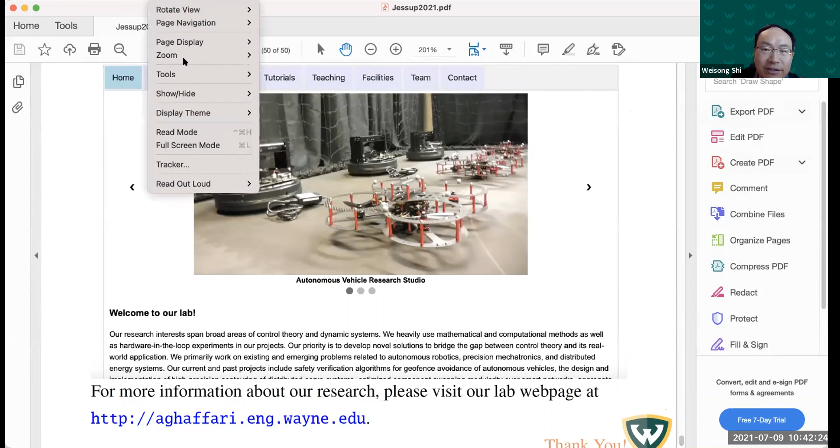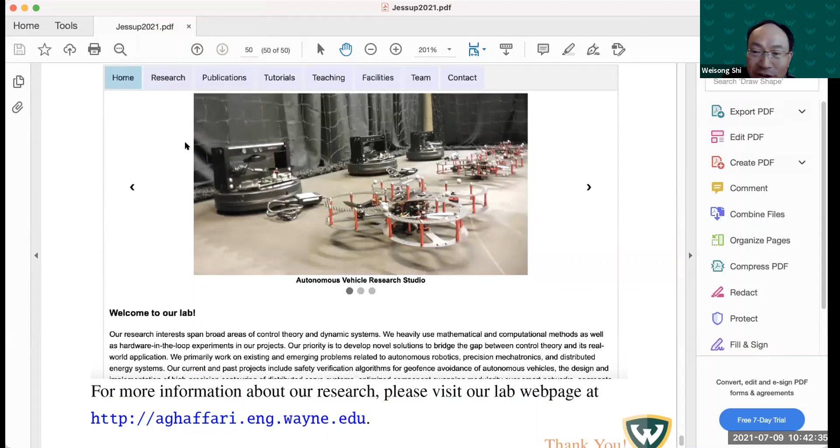Thank you, Azad. I think the talk is great, and you have theory, you have system, and we already have some discussions during this process. So now the floor is open to everybody from the audience. If you want to ask questions, please just unmute yourself and go ahead and ask.

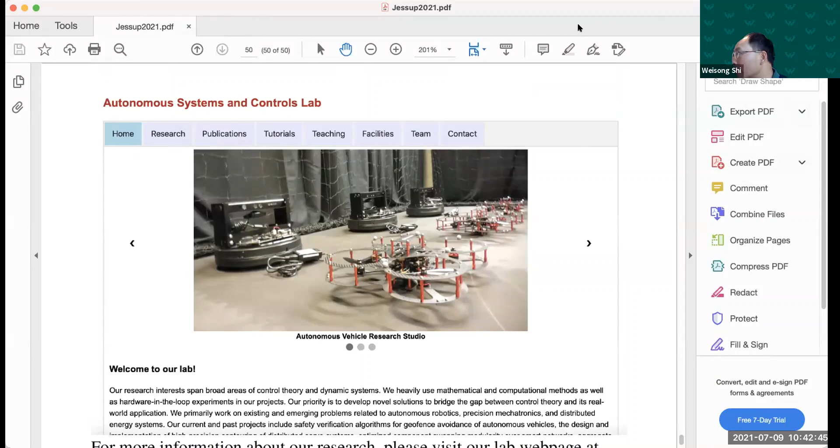Sir, I have a question on your ground vehicle formulation. I think you basically consider the kinematics problem. How much more complex would the problem be if we actually have to consider the vehicle dynamics, such as, for example, torque applied to the wheels, either accelerating or decelerating through braking?

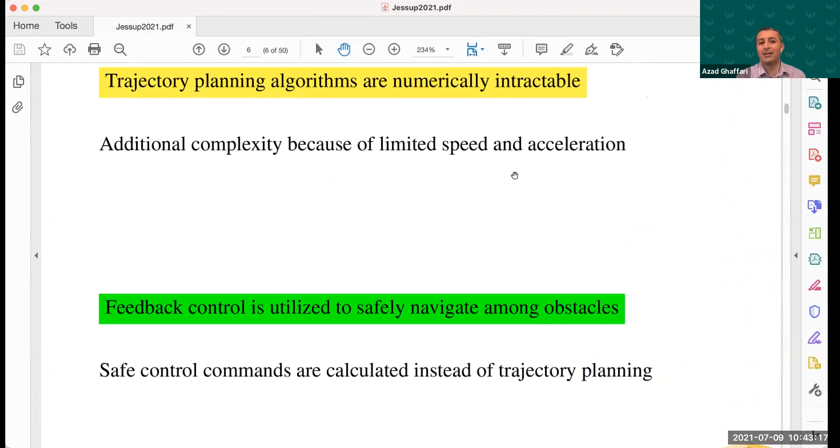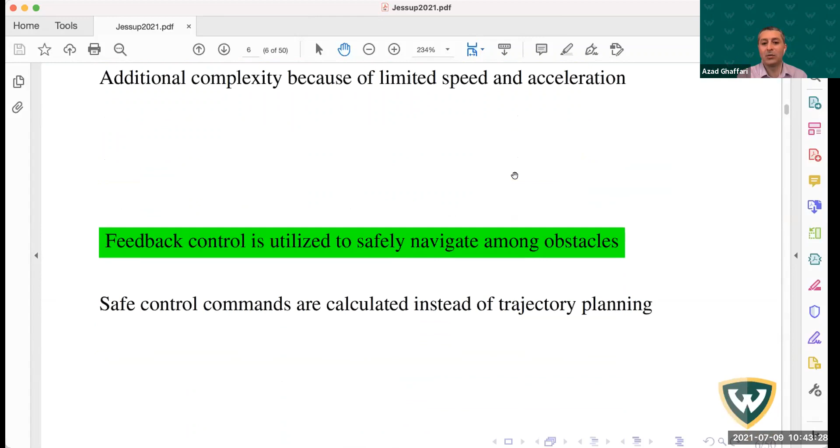Okay, that's an interesting question. Actually, what we have here, because the vehicle is not super complicated, is mostly modeled as kinematics. It's true that we have the equation for the servo system, but the servo system here is just a DC motor. But if we have a higher order system, here we have a third order system, so if we go to a higher order system, there are actually solutions that we can use to get the barrier functions.

First, we need to actually come up with some transformation. One of the methodologies out there, a recent methodology, is that you can find a diffeomorphism that converts the system to a chain of integrators. For example, if you have a fourth order system or a fifth order system and you come up with this diffeomorphism, this is a chain of integrators. So now there are methodologies that allow us to get barrier functions with incorporated safety already embedded in them. So that is one methodology, obviously.

So the problem becomes more complicated because getting a closed form solution in this situation is almost, I don't want to say it's impossible, but it's a challenging problem. So if you have that situation, one of the promising roads to take is to opt for, for example, quadratic programming. If you have a module that takes care of tracking or stability, and a module that takes care of safety, you can bring them together using a quadratic programming. Unlike MPC or other numerical optimization methodologies, quadratic programming allows us to have agile algorithms to get the solution that we want. Obviously, the end result, again, is not a closed form solution, but it will be a numerically viable methodology to pursue in such situations.

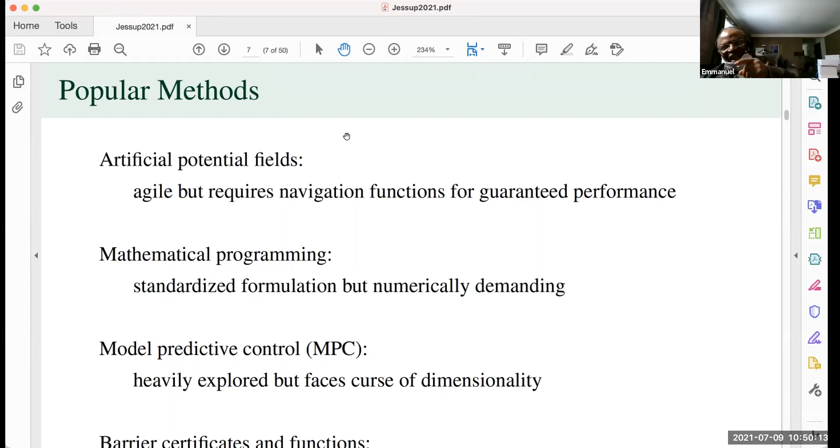Azad? Yes, hi, Emmanuel. Just a very quick point. I think maybe it was a slip of the tongue. You did mention the small d. You said it was the distance between the two vehicles. No, I believe it's the distance between the two wheels. Okay, yes, right, you are right. Thank you for the correction. Yes, then there was the equation for that function, capital B.

The capital B, because you had defined it as a function of X and Y, obviously you are considering a situation of a plane, movement in 2 dimensions. Yes, it's a 2-dimensional movement. So what you wrote, you got the total differential of that function by saying the dB/dx times x dot, plus the dB/dy times y dot, and then you said it's equal to a constant of proportionality times the function. I mean, suggesting that that's an exponential function because it's one of those that satisfy that property. So I wanted to know, did you write that equation because you had selected the exponential function, or was it from another source?

So the shape of the function is independent of the exponential decay that we have. The reason that we selected this barrier function for our application is its simplicity. There are other options out there. For example, you can use logarithmic functions or reciprocal functions for the barrier functions. This specific barrier function that we have used here is known in the literature as a zeroing barrier function. If this is what you want, it gives you the safety using this third inequality that you discussed already.

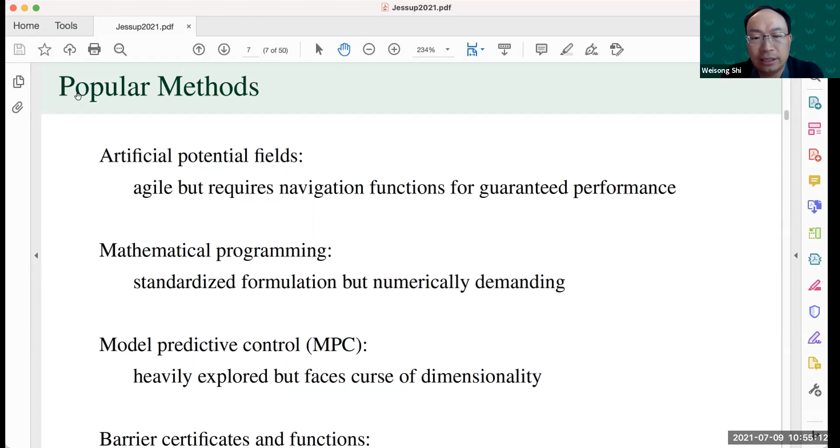Okay, very good. Thank you all for asking questions. Let me see, we have two on the chat room. Nice, nice presentation. Oh, yes. Okay, great. On the screen, Yuntao, can you make this a little bit larger?